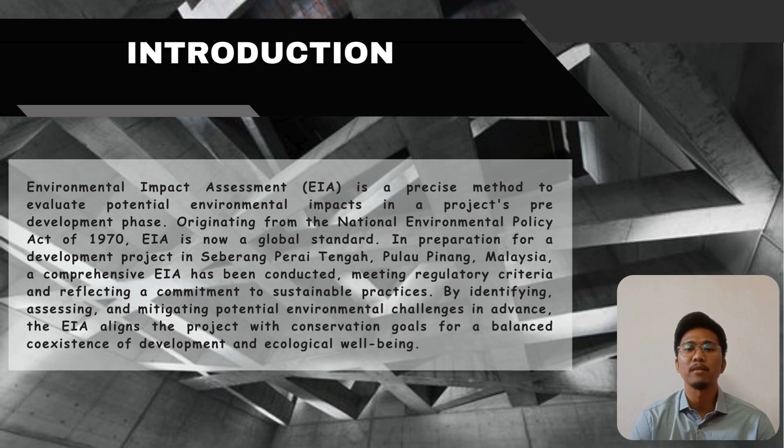Today I will talk about chapter 2, which is the project description of the EIA report. The type and category of the project is commercial real estate development, which is a dormitory project by the private sector.

The objective of this project is to address workforce housing needs and also provide suitable housing which meets the quantity and quality requirements.

The location of this project is located at Seberang Perai Selatan at Jalan Nafari, Sungai Bakap.

Penang. The proposal of this construction is one 2-storey building for facility, one storey farmhouse, one storey house electricity TNB substation, one unit of garbage collection and recycle center, and phase 2 including additional dormitory blocks.

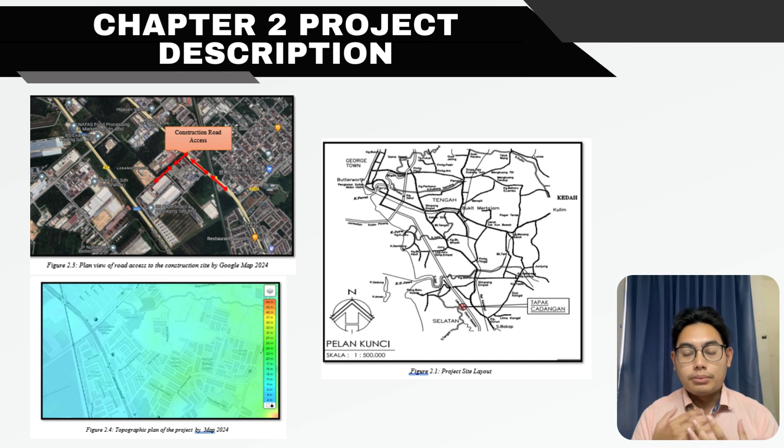Next, I will talk about the key plan of this project. There are a few types that I want to show you. The first one is the topography key plan, the second one is the access road, and the third one is the project location.

For the access road, we are able to determine which road we want to use for the exit road and existing road for transportation during construction. For the topography, we can also know about the contour and physical soil properties of that location. For the key plan, we are able to determine the magnitude and the precise, accurate location of where it is.

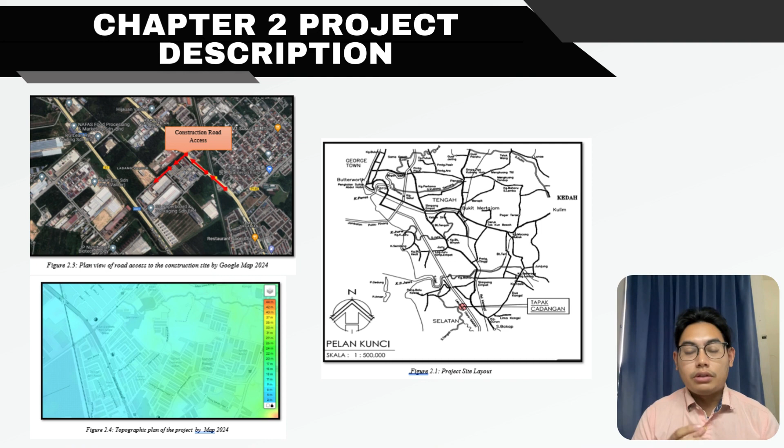For this session, I will talk about the major components of the project, which is the parking lot's capacity, which will fit 96 cars, and the motorcycle park, which will also fit 96 motorcycles.

The schedule of the floors: the ground floor, which has Dobi, food court, and the first floor has a gym and also a clinic. For the rooftop, we have a water tank.

About the detail of the blocks, the foundation is made of piles, the wall is concrete, and the window is glass with aluminium. For the pre-construction and construction activity, site preparation includes clearance, soil assessment, and fencing, and the detailed activity for filling and excavation, including transportation method.

Next is construction of internal roads within the construction area.

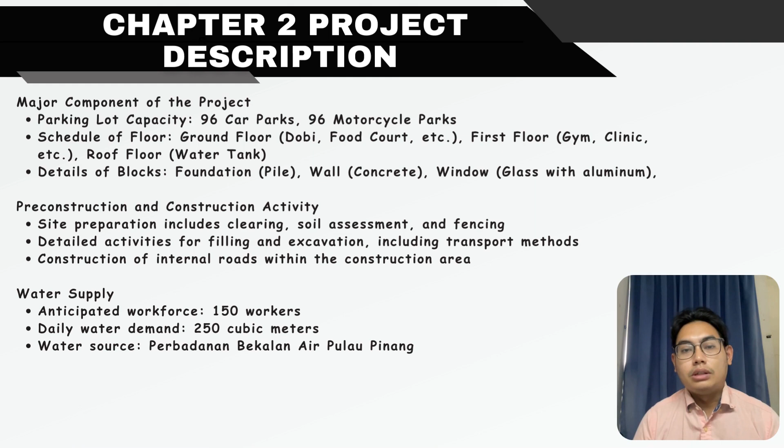For the water supply, it is anticipated within 150 workers, daily water demand at 250 cubic meters, and for water resources we will refer to Perbadanan Bekalan Air Pulau Pinang.

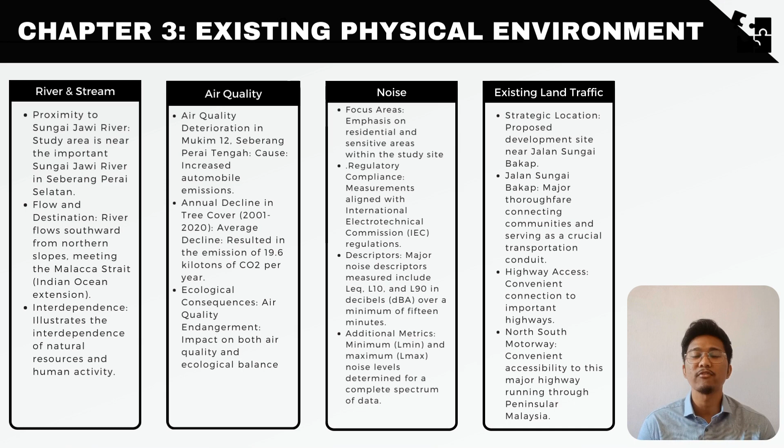Next, for Chapter 4, consists of evaluation impact, mitigation measure, and monitoring programs. First, for evaluation impact, this chapter initially assesses the potential environmental impacts of the proposed project including air and water quality, soil stability, biodiversity, and socio-economic factors. It used a holistic approach to identify direct and indirect impacts, aiding stakeholders in informed decision making.

Then proceed with mitigation measures. This report presents a set of mitigation measures aimed at reducing or mitigating the identified adverse effects, tailored to the project's specific characteristics and the local environment, ensuring a balance between development objectives and environmental preservation.

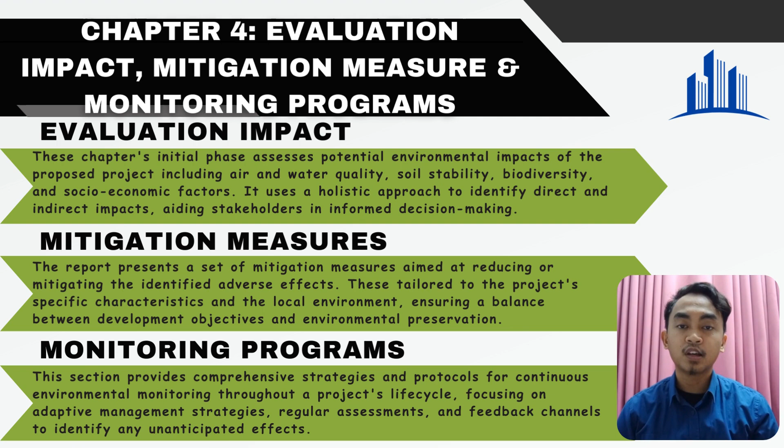Next one is monitoring programs. This section provides comprehensive strategies and protocols for continuous environmental monitoring throughout a project's life cycle, focusing on adaptive management strategies, regular assessment, and feedback channels to identify any unanticipated effects.

Moving forward for project development phase, during the pre-construction phase, the impact assessments are typically brief and insignificant, focusing on major activities such as conceptual design, field data collection, land survey, geotechnical investigation, and as well as social and environmental impact assessment.

So for the during-construction phase, the project faces significant environmental impact due to access road, workers camp, excavated material, waste management, equipment mobilization, erosion control plans, emergency response, land clearing, biomass handling, and barrage construction.

So for the last, during post-construction, the project requires monitoring and management. Major activities such as socio-economic environment, air pollution, noise pollution, vibration control, and water pollution need to have guidelines according to the regulation.

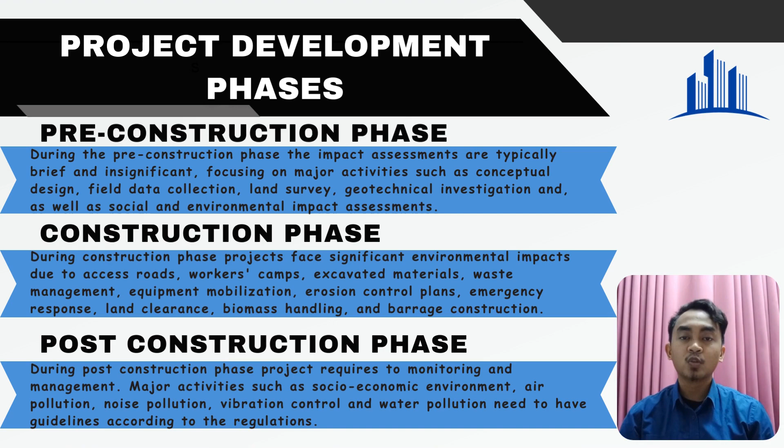Pre-construction phase consists of major project activities such as land survey and site investigation, soil and geotechnical investigation, and the last one for social impact assessment and environmental impact assessment.

The potential significant impact for this project: no significant impacts are expected from these activities. Therefore, the magnitude of potential impact is also none.

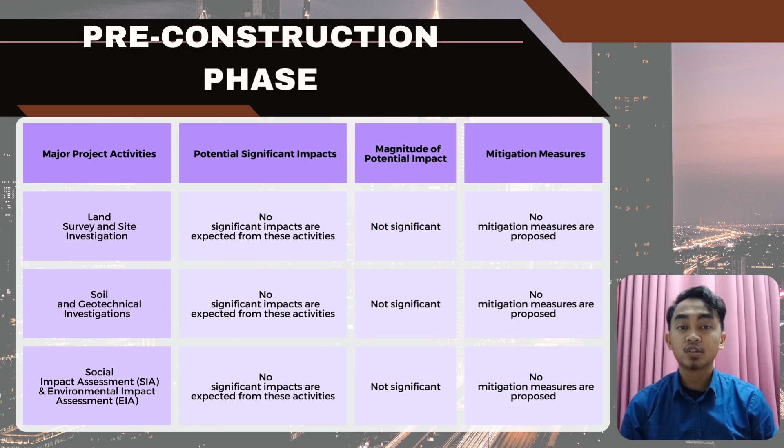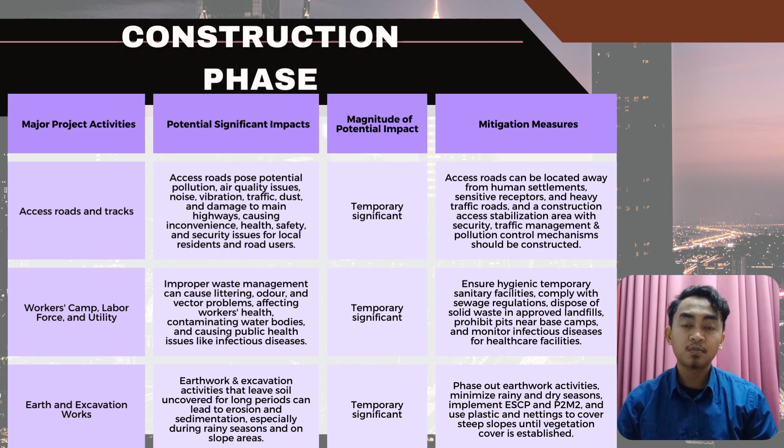Last but not least, the mitigation measure for earthwork and excavation is to phase out the earthwork activities, implement ESCP and P2M2, and use plastic to cover steep slopes.

For the post-construction phase, the major project activities are socio-economic environment, air and noise vibration control, and water pollution. The potential significant impact for socio-economic is increased status of living for the local population residing, in terms of public utilities, amenities, infrastructures, and increased employment opportunities.

Then for air, noise, and vibration control, it is primarily due to heavy vehicle movement and transport-related activities. Next, failure to comply with standard discharge levels can lead to river pollution and degradation of water quality due to indiscriminate waste dumping.

The magnitude of potential impact for these three is significant long-term beneficial.

For socio-economics, no mitigation measure is needed. Next, for air, noise, and vibration control, measures needed include traffic signs, junctions, road maintenance, efficient systems, landscaping, and noise mitigation. For water pollution, the STP needs to manage sewage from residential and public areas, preventing pollution and river accumulation.

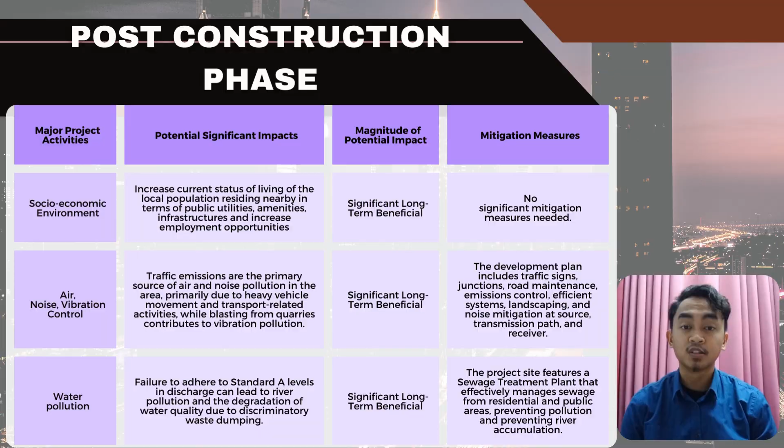The Environmental Management Plan (EMP) is a guide that outlines the actions needed to meet a project's environmental protection requirements. It focuses on preventing and mitigating negative impacts during different project phases and analyzing potential responses. A certified professional in erosion and sediment control and registered consultant with the Department of Environment (DOE) will prepare the document. The plan outlines how the project will manage activities and associated risks based on their significance.

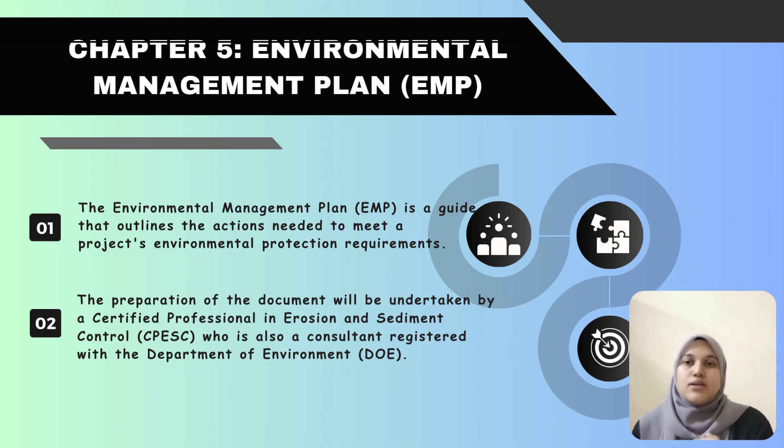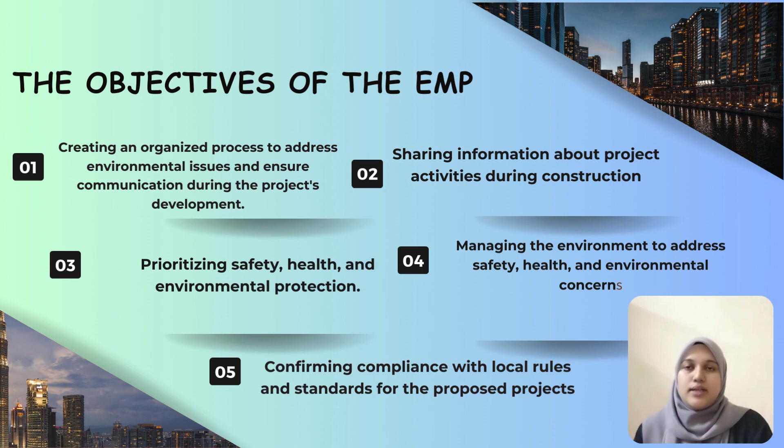Next, it shows the objective of the EMP. This highlights the key aspects of the EMP, which insists on the establishment of an organized process to address environmental concerns, facilitate communication during construction, ensure safety and protection, and guarantee compliance with local standards for the proposed project.

Moving on to the next point, land disturbing pollution prevention and mitigation measures mean taking proactive steps to reduce the negative environmental impacts of activities changing the natural landscape, such as excavation, grading, and construction. The land alteration aims to reduce impact on ecosystems, water quality, and nearby communities.

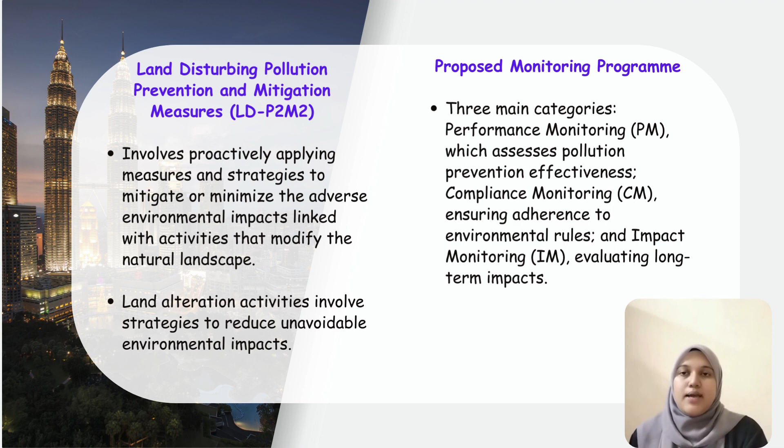The proposed monitoring program involves three main categories: performance monitoring (PM), compliance monitoring (CM), and impact monitoring (IM). Then it shows the performance monitoring framework includes PM parameters, monitoring location, monitoring frequencies, instruments required, and personnel required.

Performance monitoring (PM) is about regularly checking how effective the plans are at preventing pollution and reducing impact.

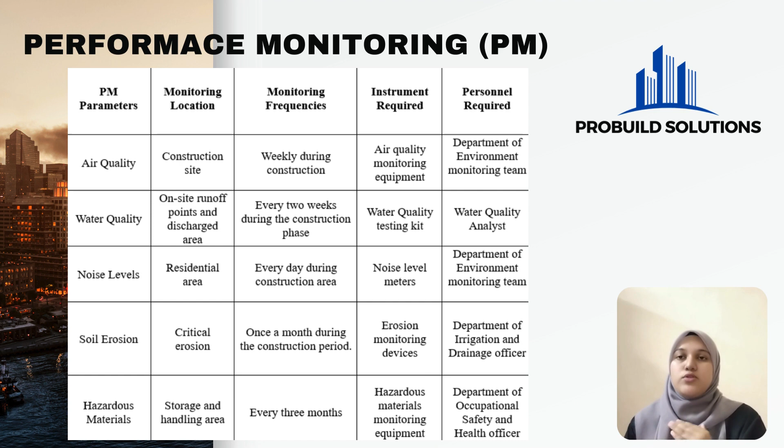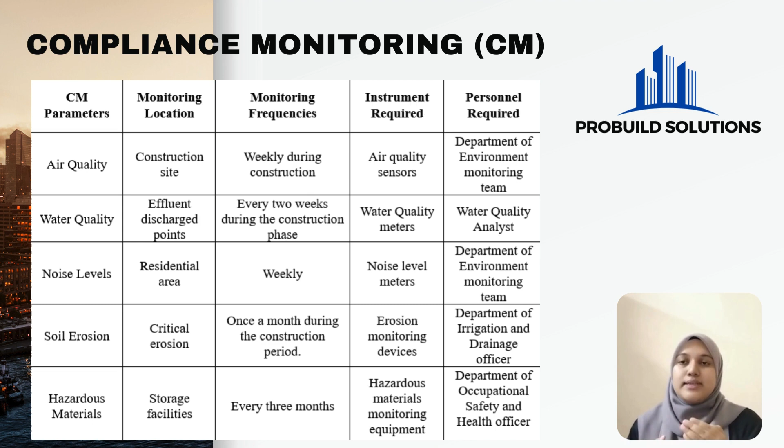Next, it shows the compliance monitoring framework includes CM parameters, monitoring location, monitoring frequencies, instruments required, and personnel required. Compliance monitoring (CM) is a process to make sure projects or activities follow environmental rules and standards.

Then, impact monitoring was conducted to observe the project site condition, ensuring that the EIA study findings were accurate, mitigation measures were implemented correctly, and their effectiveness in reducing adverse environmental impact was assessed.

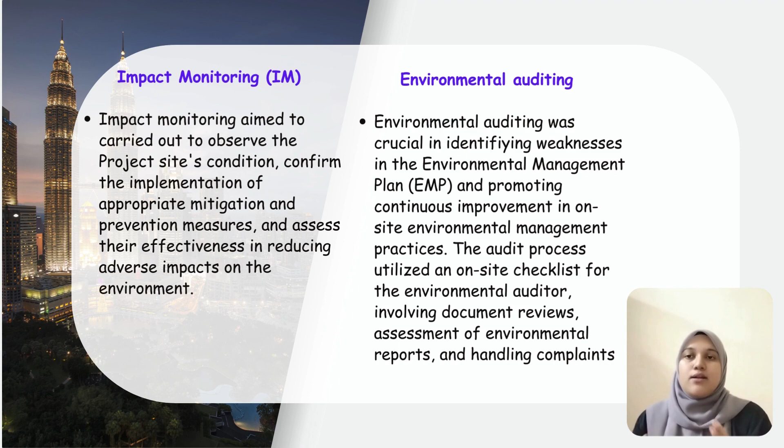Further, environmental auditing was crucial in identifying weaknesses in the environmental management plan and promoting continuous improvement in on-site environmental management practices. This audit aims to ensure that the project adheres to the EMP and the conditions of approval outlined in the EIA.

As the conclusion and recommendation, the specific location will minimize its impact on the surrounding environment. The environmental impact assessment (EIA) study identified both positive and negative effects. The EIA concludes that with effective implementation of recommendations, the project will not have significant adverse effects on the environment.